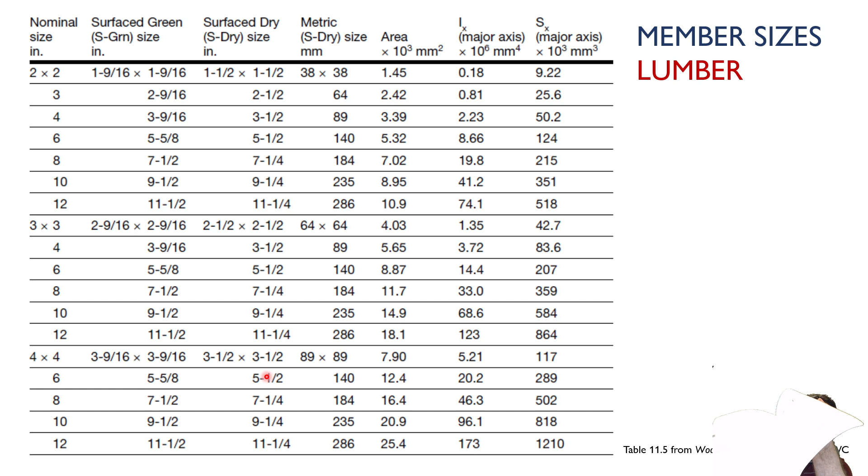So where do I find those sizes? This is a question we get all the time, because it's clear that it's not 2x4, the nominal size, but what is it? If you have the Wood Design Manual, in volume 2, if you go to the reference section near the beginning of that volume, there is a table, 11.5, that gives you the sizes of every piece of wood.

I've put those here for lumber. So here we have a 2x4, and we can see that it's actually 38 by 89. We can also see what the cross-sectional area is - we can easily calculate that, it's just 38 times 89 - but the table also gives the I, the second moment of area, or what we commonly call the moment of inertia, times 10 to the 6 millimeters to the 4, for the strong direction bending. It also gives the S, the section modulus, which we use in our bending equation.

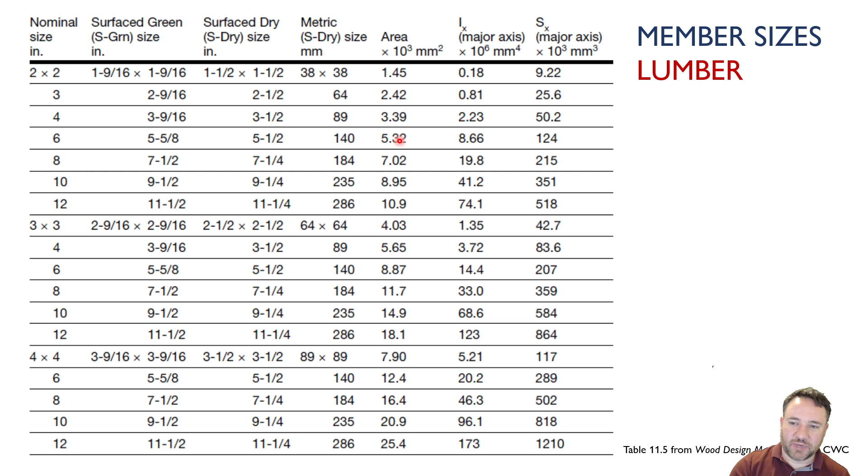If you need to find those values and don't want to calculate them - this is BH cubed over 12, and BH squared over 6, if I recall correctly - you can just grab them from these tables. There's 2x2, 3x3, 4, 5, 6, 3x4, 3x6, 3x8, all the way up to 8x8, 10 by 10, and 12 by 12. So these are all of the pieces of lumber from smallest to largest that are available.

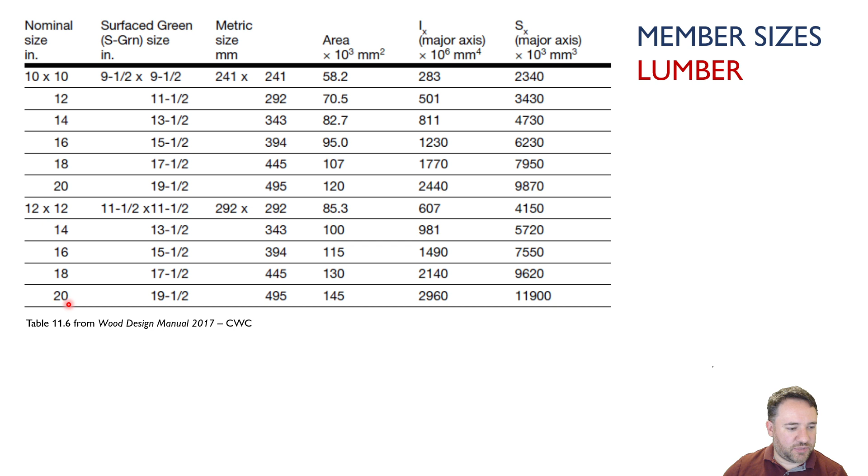Now, actually getting your hands on a 12 by 20 might not be the easiest thing to do, so when you're going into wood design, I wouldn't assume that you'll be able to get that from a lumber yard. Probably you're going to have to build something up if you want it to be that big. But anyway, all the values are there.

Okay, so now moving into grading - how do we figure out what the strength of a certain piece of wood is? When we get it from the lumber yard, it's going to come with a grade, so it's going to say this piece of wood is a certain species group.

So it might be SPF: spruce, pine, fir. And on top of that, it has a grade. So this is a number 1, or it's a number 2, or it's a select structural, which is like the highest grade for this kind of lumber. And depending on the grade, it'll be higher strength or lower strength.

There are multiple ways that they can do that grading. Most common is called visually graded lumber, and that's where number 1, number 2, select structural comes from. So a large majority of lumber is graded this way. Basically, you have a set of rules: you can have so many knots, a certain grain angle, so many checks or splits, whatever. And based on those qualitative requirements, you stamp a grade on it, and we assume a certain strength.

Now, if you take a larger piece and saw it into a smaller piece, then the grading is no longer accurate. Like if I took a 4x4 and cut it into 4 2x2s, those 2x2s would no longer have the same grade. That's not permitted. You have to get it regraded if you wanted to do something like that, technically.

Another way is to do machine stress rated lumber, which basically means they take the pieces of lumber and run them through a machine. The machine bends it a little bit, pushes it a little bit, figures out what the stiffness is, and from that correlates what the mechanical properties are going to be for that piece of wood. So if you have an automated process where you're building engineered wood products and you're stringent about quality control, that's a thing that you might do.

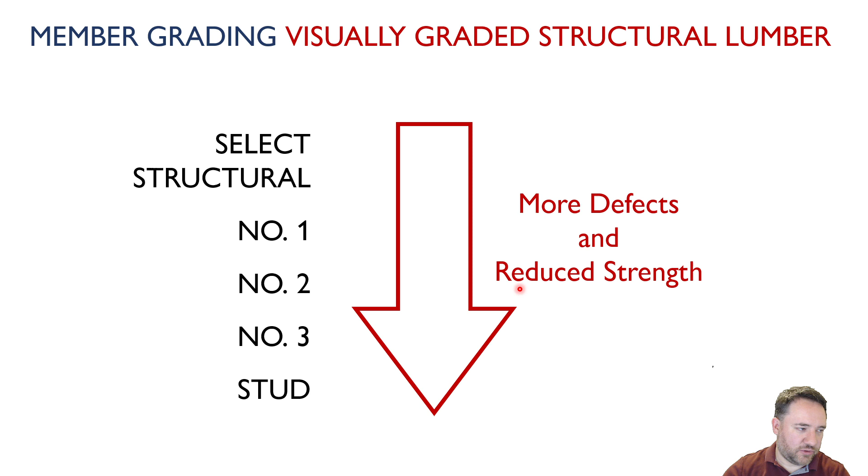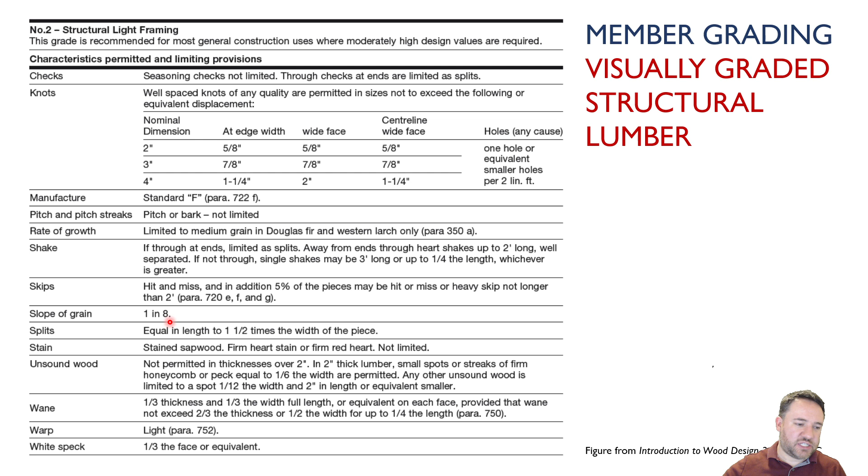Slope of the grain is a big one because it affects, like if I'm pulling on this, what percentage of the load is going purely parallel to grain. But then a small portion, if the grain is sloped, is loading perpendicular to grain, which we know for wood is a very bad way to load it. So that will affect the strength, for example, and a whole bunch of other requirements.

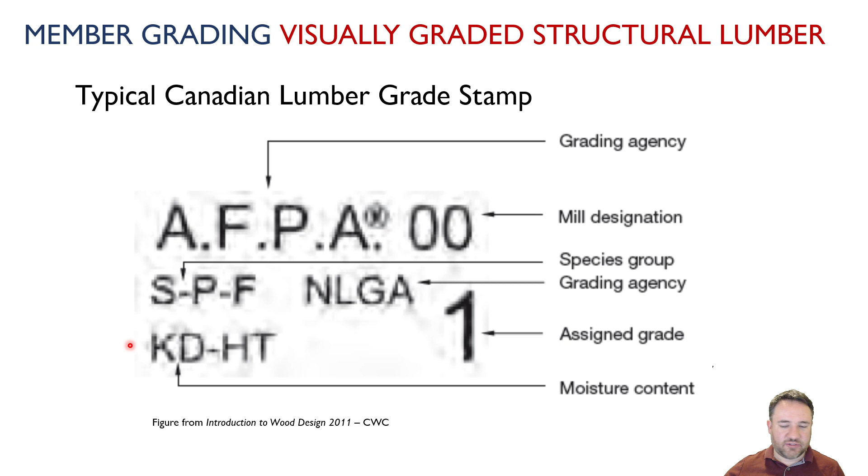And then once they grade it, they take a stamp and they stamp the piece of wood. Each piece of wood will have a stamp that tells who graded it, where the piece was milled, what the species group is, like SPF, Doug fir larch, or whatever, and what grade was assigned. So this is a number 1, SPF number 1. The stamps might look a little different than this, but they should all have that required information.

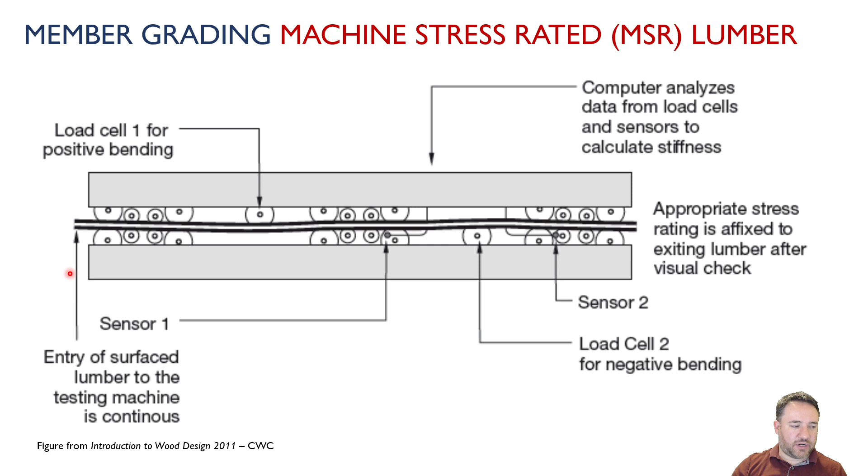This is what that kind of machine might look like. There's one, so you can see you just feed in the piece of wood from one end, and it comes out the other end, and it'll tell you what the grade is, and then you can put the stamp, or it might put the stamp. I'm not sure. So machine stress rated stamp might be a little bit different. It says that it's machine stress rated.

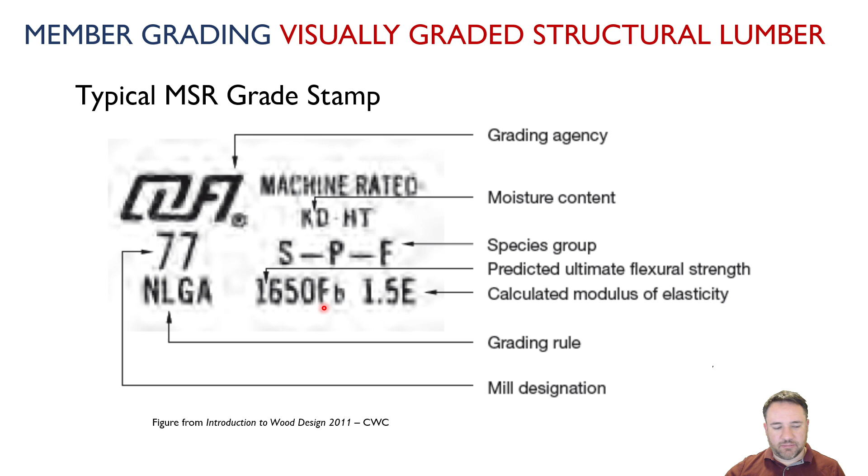Now we no longer have number 1, number 2, etc. It's actually giving a predicted strength and predicted modulus of elasticity coming out of that machine process. So you can have like a whole set of values for that. And we'll see that when we look at the tables. Okay, so those are the 2 types of visual grading.

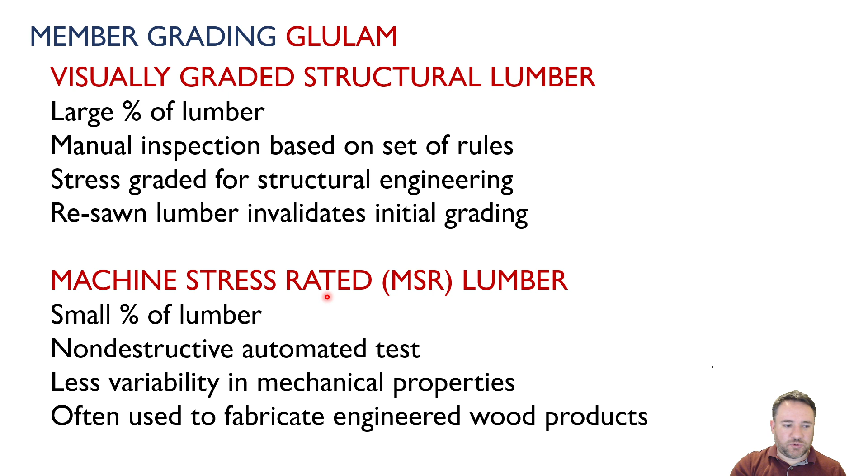Now for grading of glulam, it's a little bit different because it depends on what is the composition of the glulam, right? So here are a couple examples for beam grade glulam. And you can see that depending on whether the member is loaded as a simply supported beam, like just sitting here and loaded in the middle like this, or whether it's loaded as a continuous beam or as a cantilever, so it has bending in both directions, we might lay up different pieces when we fabricate the glulam.

So the glulam is layers all glued together. So I can change the quality of those layers depending on what my purpose is. So E grade in general, and we'll see this in the tables, E grade is meant to be bending in only one direction, and so they're going to put a strong ply just on the tension side because that's going to be the critical side for bending resistance if I'm only bending in the downwards direction. So if I'm only bending like this, for example, I'll put the stronger piece on the bottom.

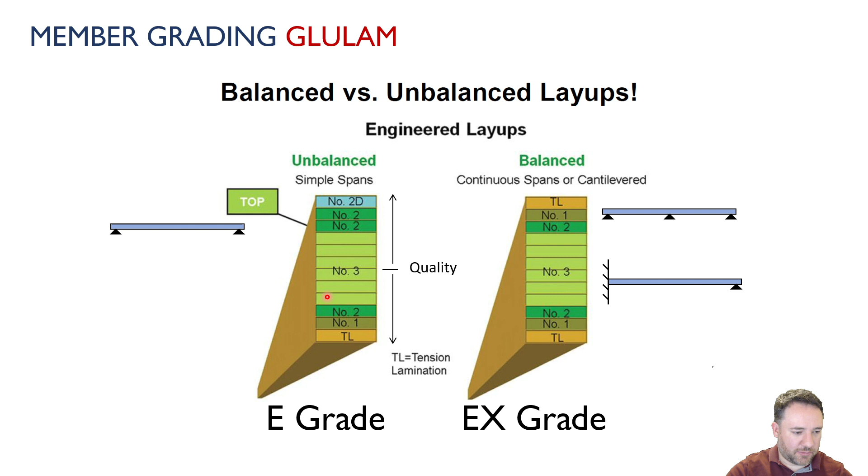EX grade means that it's in both directions. And so there'll be kind of a standard for this. Now there are numbers in the code for this, but if you are designing with glulam, you should check the manufacturers in your area because they likely have a whole set of different properties for their own glulam because they might lay it up differently. Like they might have their own proprietary way of distributing the strength. Then based on test data, they would come up with their own strengths. But in this course, we're going to only use the values that are in the book.

So you can see all of the different grades. So they have ones that are intended to be used for beams. There are some that are specifically intended to be used for columns, and there are others that are specifically intended to be used for tension members. You can mix and match. I mean, the columns can take bending and the beams can take axial, but they have a primary intent based on how the layups are.

And there are different species as well, and a lot of this will have to do with where in the country you are when you order the glulam. So you might have spruce pine species in the glulam, you might have Douglas fir larch, and you can see that this 20 is actually kind of a measure of the strength. It's kind of an indication of the strength right in the grade marking. So you can see the Doug fir larch ones, you can get higher strengths, and we'll see those in the tables.

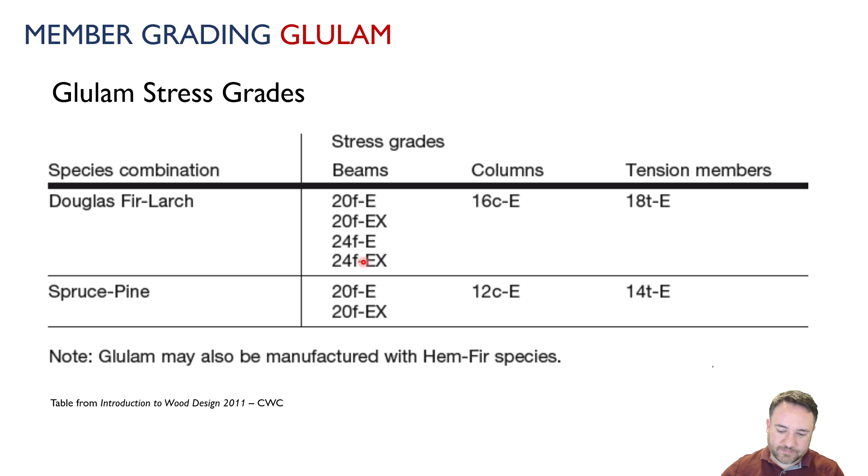Okay, so now that I know all about how these things are graded, how do I actually go about finding the strength that I need for my specific equation from the standard that I'm trying to apply? So for glulam, it's quite easy. I just go to the table, and as long as I know my species and grade, I can pick out whatever quality I want.

But for lumber, it's a little bit tricky because there are multiple tables for strengths depending on what kind of lumber piece that you're talking about. So the first step is actually to determine the grade category. So this table 6.2.2.1 in the standard is the first place that you would go. And basically what you need to do here is based on the size of the piece and based on the grade of the piece, then you determine which grade category you're in.

Okay, so for example, if I have a 2x4, but if this is a 2x4 number 1, then over here, you see my smaller dimension is 2. My higher is the 4, which is 89, 3.5, right? So 38 by 89. So it could be any of these three. Then I said, okay, well, I'm talking about number 1. So I'm talking about this one here. So I am in the structural light framing grade category. Okay, so I need to go to table 6.3.1a. And at the top of that table, it says structural light framing. And so that's where I'm going to get my property values for.

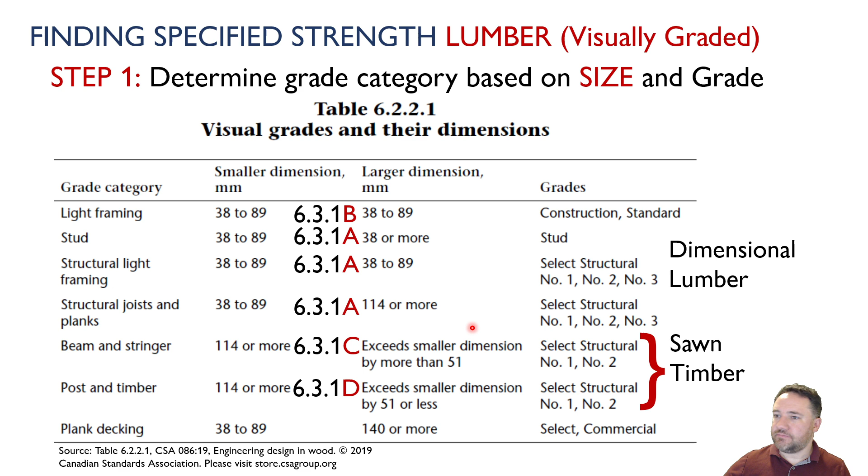Okay, so then once I know which grade category I'm in, I can go to the appropriate table. This is just an example of one. So this is 6.3.1. So this was structural light framing. So that's where this 2x4 is. Structural light framing, if it's like a 2x4 SPF number 1, then I can find my species. So let's say I'm SPF number 1. And then I can read across here all the different values for strength and for stiffness. So bending, longitudinal shear, compression parallel, compression perp, tension parallel, and my two moduli for my average modulus of elasticity and my 5th percentile modulus of elasticity.

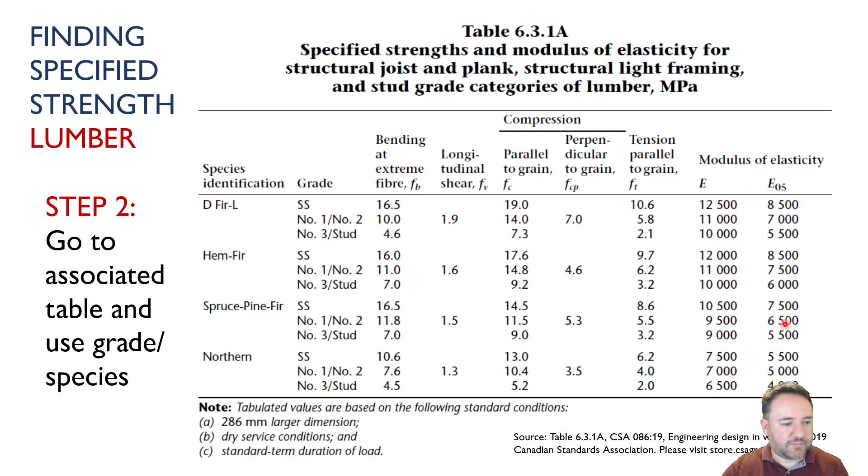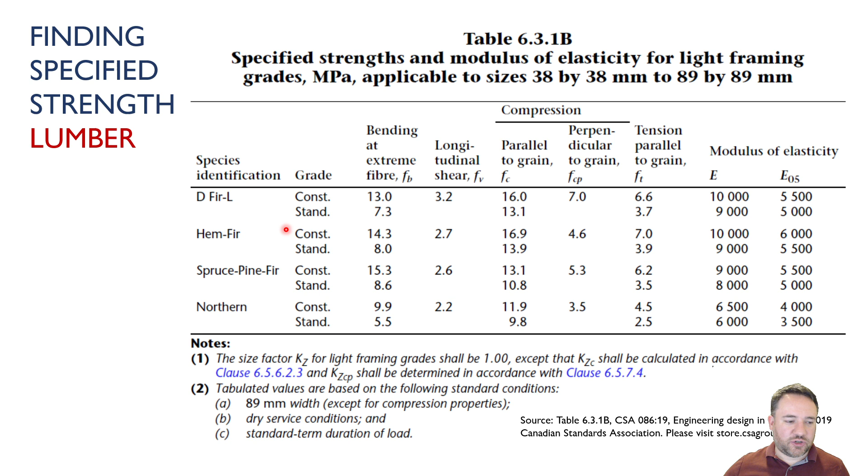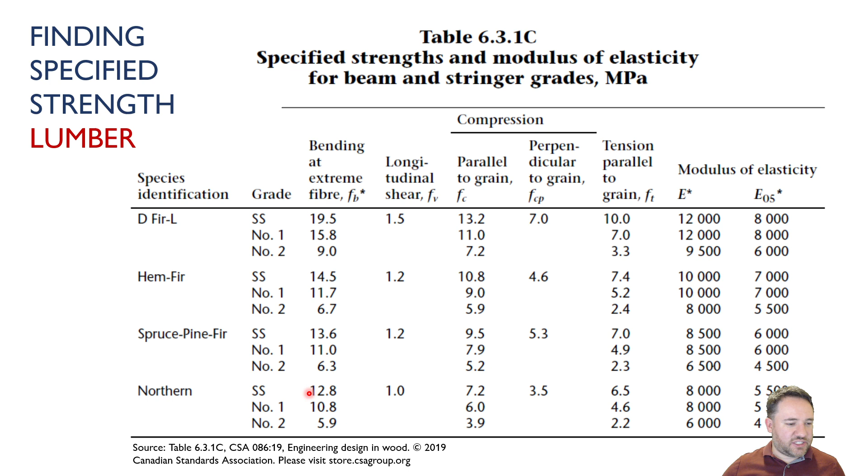Okay, here is table 6.3.1b, which is the one for light framing. So this one has different grades. Okay, so it's also 2 bys, but let's say wherever you are, it's like a different grade. It's not number 1 or number 2. It's graded differently. Then you go to this table. You know, if it's a sawn timber or beam and stringer, so this is a sawn timber type of grade. And you can see all of these values are all different for all of these. So there's a lot of work gone into figuring out what are the appropriate values for each of these. So each of these numbers represents a whole bunch of tests.

Okay, and you see these tables have a lot of notes on the bottom, some of them, when you go to the standard to take a look at them. Here's one for example. So when I'm talking about beams and stringers, it says below that this table is intended for when the loads are applied to the narrow face. So let's say this is a beam and stringer, so it's a sawn timber, quite a bit bigger than this. But let's say I have it oriented like this. The table there is assuming that you're loading it on the short side, right?

Now it says if you are loading it on the long face instead and bending it in this direction, then you have to modify your bending strength, and you have to modify your modulus of elasticity as well. So pay attention to those notes. There aren't a lot of them that change a lot.

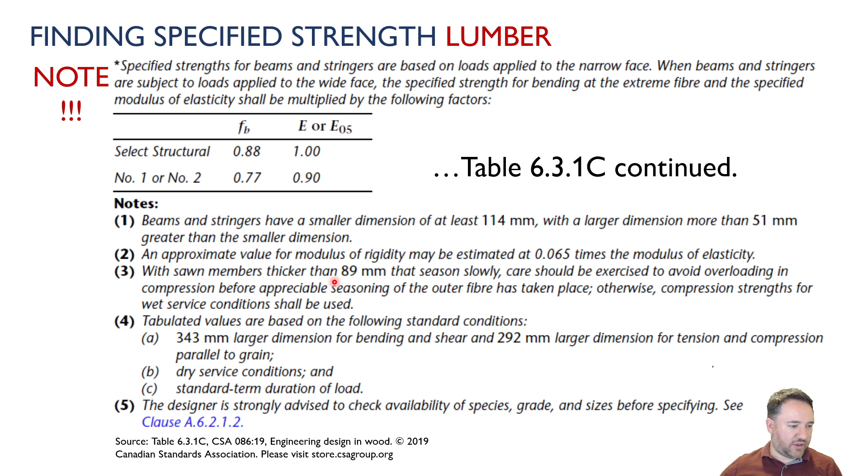Most of them are kind of warnings, you know, be careful to season the wood properly so that it's for sure dry and all this stuff. But that's one for sure that, you know, you never know could come up.

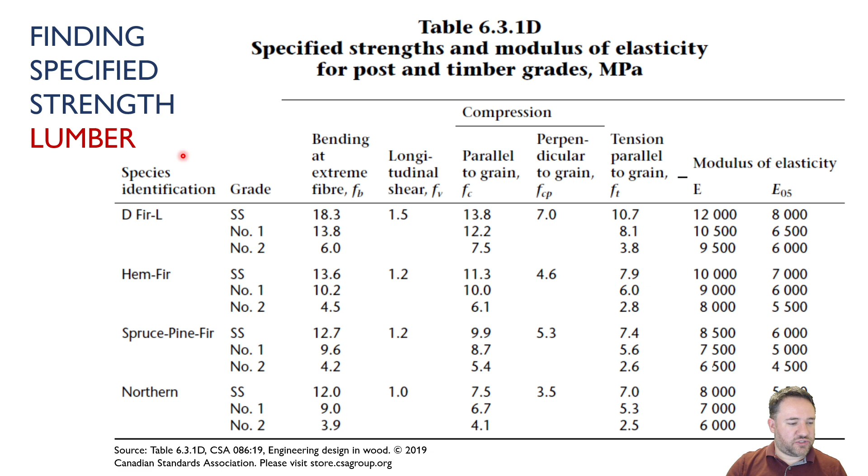Okay, and then this is the last one, which is for post and timber. These are for the ones that are more square. So basically the cross section is square or close to square. They're probably going to be columns, posts, right? And so these are all the values for those, and you know, a ton of notes.

Okay, and here, you know, it says, just like I was saying, designers strongly advise to check availability of species, grade, and sizes before specifying. So you're going to go through a lot of trouble and make a timber design, and then find out when the contractor goes to build it that there's no way they can get that size of a piece of wood, and then you're going to have to go through a rigmarole,

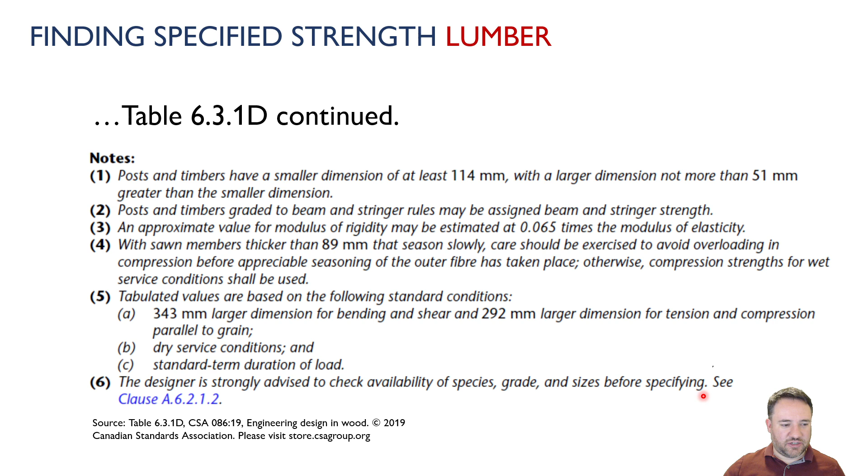and there's going to be construction changes, and it's going to cost the owner money, and they're going to be upset, and then you're going to be upset. So just be aware of what's available in your area as you do the engineering. So we're not engineering in a bubble, obviously.

Okay, so then that was for all visually graded lumber. For MSR lumber, there's a table for the machine stress rated stuff. You can see the grades. We saw these in the grade marking. This is a strength and a stiffness combination, and then they have values as well.

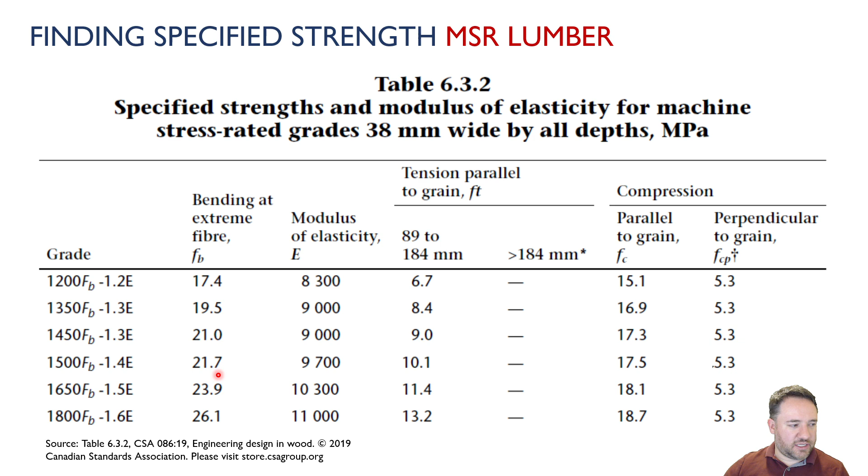I'm not going to specify these kind of members in this course, but you know, if you ran into something like this, then this is where you would get the values. There's table 6.3.2 for that in the standard, in the O86 standard.

Now, when I'm doing Glulam, it's a bit easier because I no longer have to go to a grade category. All I need to know is the species and the grade. So if I know I'm going to use Douglas fir larch 20f-E grade, then I can find my bending moment, my shear, my compression parallel resistance, compression perpendicular resistance, all of the required resistances, including modulus of elasticity, are all in this table.

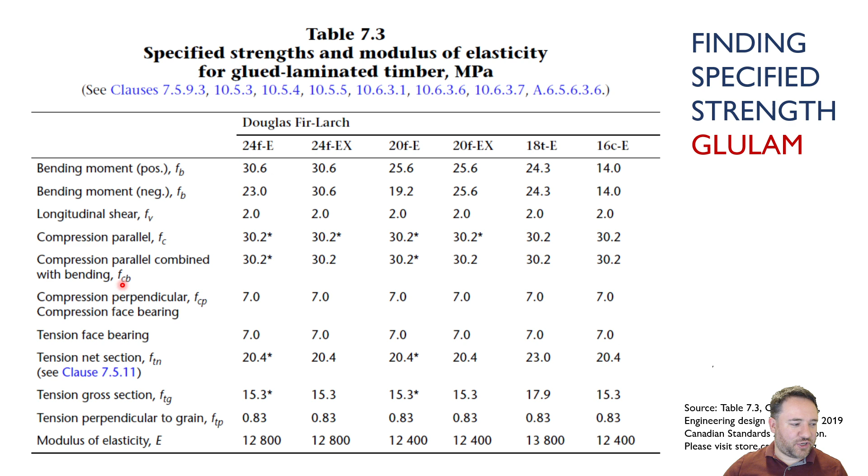These tables, it's a bit funny that these ones are flipped relative to the other ones. So the other ones had the strengths on the top and the grades on the side. This one has the grades on the top and the strengths on the side. So anyway, I'm sure you're going to figure it out. So that's for Douglas fir larch species.

This table continues down a bit further for two other species combinations, spruce, lodgepole pine, jack pine, which in this course I'll just call spruce pine, and hem fir and Douglas fir larch combination here. You can see the effect of the different layup in this table. For 20f-E, remember that E is the one that's not symmetric, so it has a stronger piece of wood on the bottom of the glulam.

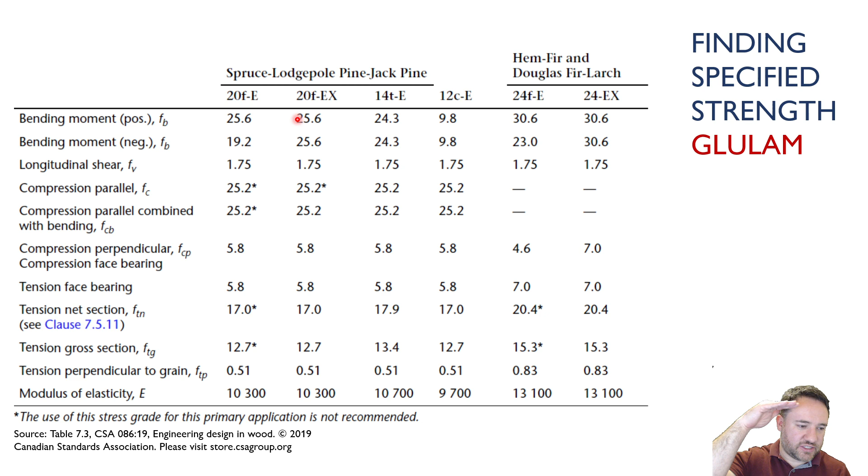You can see that the bending moment in the positive direction is larger than the bending moment in the negative direction. So you can apply negative moments to those, but they won't be quite as efficient as if I use the 20f-EX grade, which has the same strength in both directions because it's got strong plies on the top and on the bottom.

Okay, so I'm just going to finish this off by showing a few examples of how to go through that process. I'll point a few things out, won't take very long. So I'm going to find the strengths for these three different pieces of wood. One is a 2x4 SPF Select, that's Select Structural. And I want to find the compression resistance parallel to grain. So how do I do it?

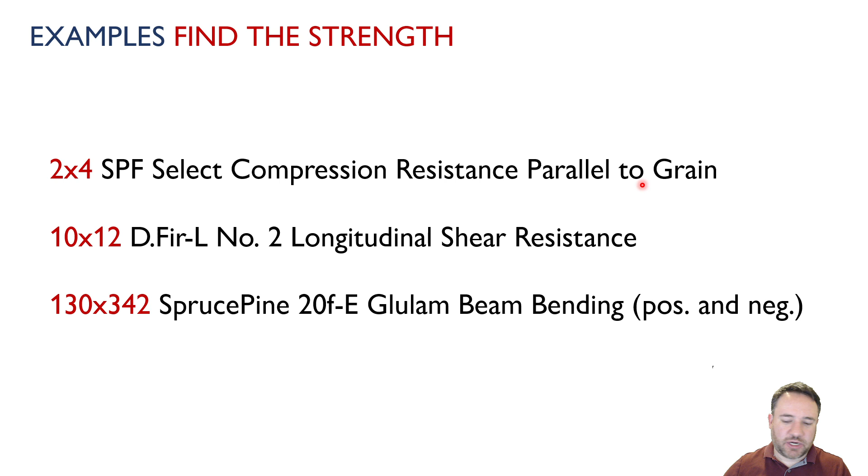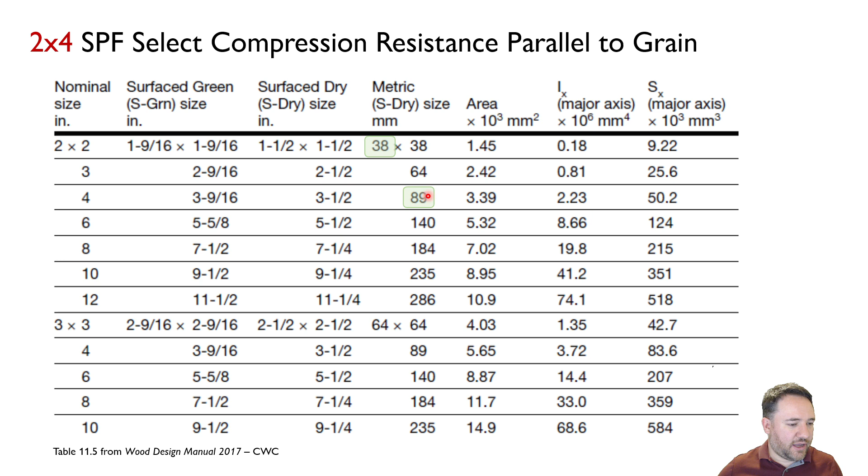I'm going to start by figuring out what the size of my member is if I don't already know. So a 2x4, going to this table 11.5 in the wood design manual, and I see that it's actually 1.5 inches by 3.5 inches, which is actually 38 by 89. So now I know the size of my piece of wood so that I can go to my grade category table and figure out which grade category I'm in.

So smaller dimension was 38. That's the 2, it's a 1.5. The larger dimension was 89. So actually there are 3 different options here for grade categories that will work, right? So it could be light framing, could be stud, could be structural light framing.

But I also had the piece of information that I'm talking about select grade. So that's select structural grade. So that's not available in light framing or stud grade categories. It's only available in structural light framing grade category. So I know that I'm talking about structural light framing grade category for this particular piece of wood, 2x4 SPF Select.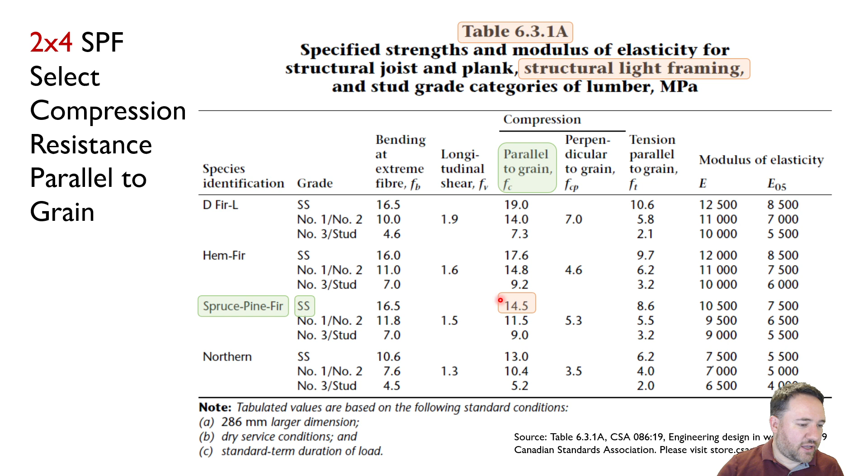Second example, larger piece of wood, 10x12 Douglas fir larch number 2, looking for a longitudinal shear resistance. So I'm going back to table 11.5 to figure out what the actual size of that piece of wood is. So I've got a 10x12, which is actually 9.5 by 11.5. So I have a 241 by 292.

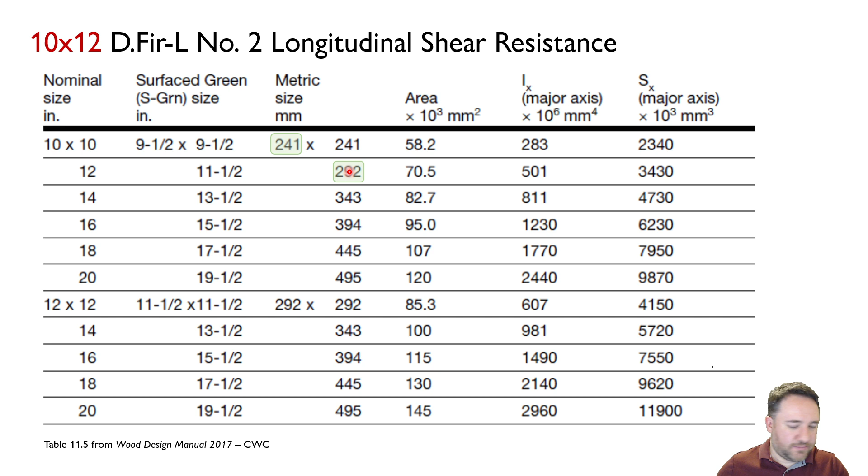So going to my grade category table, I know I'm 241 by 292, so small dimension 241 is only these 2 possibilities. 292 is the larger one, exceeds the smaller dimension by 51 or less. Okay, so how much does it exceed? 292 minus 241 is 51. Okay, this says 51 or less. Okay, so this is right on the border.

Okay, you'll notice this one says exceed smaller dimension by more than 51. So that means 52 or greater. I don't know why they didn't put this a little bit higher to make it a little bit more obvious that this one would fall into this category. But anyway, so it's 241 by 292, 51 or less. So it falls then into post and timber category. Okay, one because it fits here, it's a number 2, so that's good.

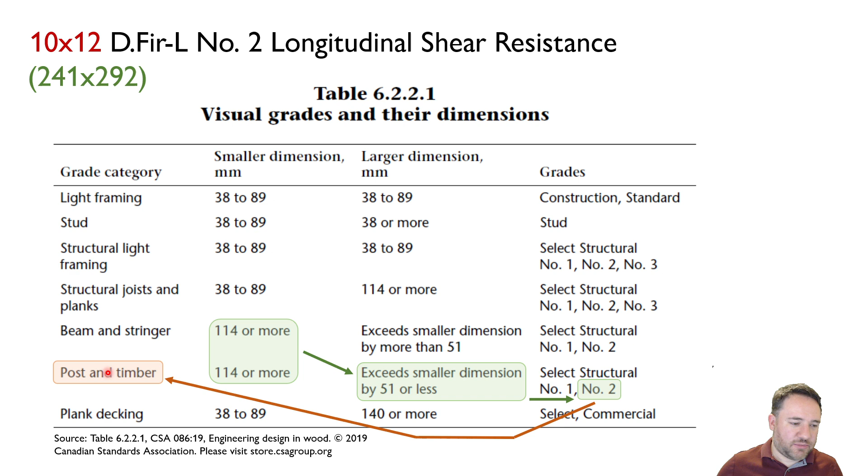Post and timber. So now I have to go to the table for strength, 6.3.1D, which is the post and timber grade category table. And I know I have a Douglas fir larch, number 2, and I'm looking for longitudinal shear. And the reason I picked longitudinal shear here is because some people get confused by the fact that there's only one number in here, and these are blank.

This 1.5 applies to all grades. So it just means that the longitudinal shear is the same for every grade of Douglas fir larch. So even though I'm down here, the 1.5 applies. Okay, so my longitudinal shear for my Douglas fir number 2 is 1.5 MPa.

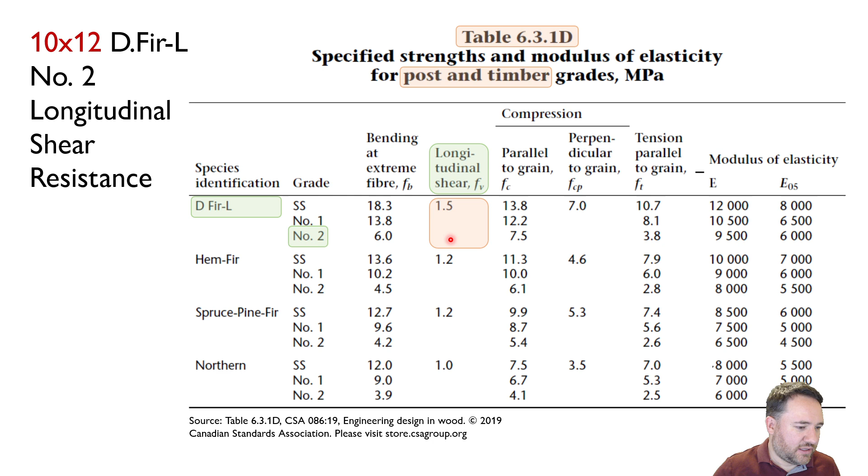Last one is a Glulam example. So I have a spruce pine 20f-E Glulam beam. I'm looking for positive and negative bending strengths. Okay, so the first thing I need to do is go to that table 7.3 and find out which species I'm talking about. So this is spruce pine. So it's not the top part of the table, it's the bottom part of the table.

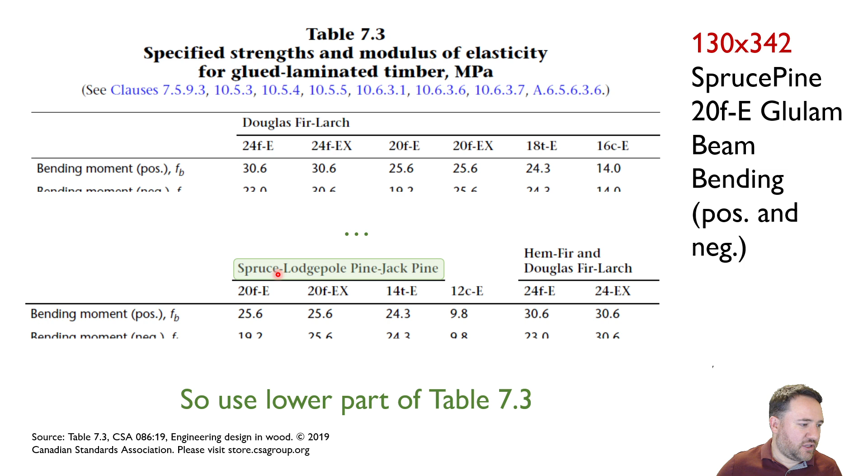Spruce, lodgepole pine, jack pine. So I'm going to use the lower part of this table now. Okay, this is just that lower part blown up. Spruce, lodgepole pine, jack pine, 20f-E grade. And I'm looking for bending moment positive, bending moment negative. And here you see I have a positive of 25.6 MPa and a negative of 19.2 MPa.

And this is one of those cases where it's different. And that's because this is not a symmetric layup pattern. So the bottom ply is only the strong ply and the top one is not stronger than normal.

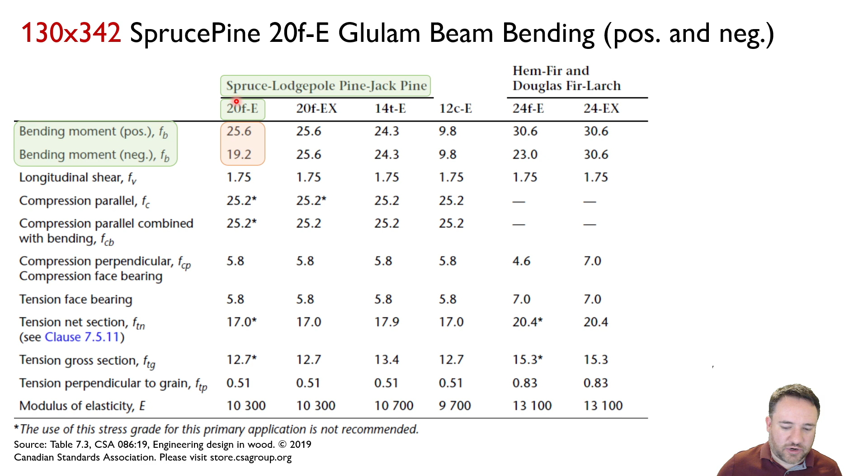So now we know how to specify wood properties. We know what the grades mean. And so hopefully now when we dive into doing design for tension, design for compression, when we need to find those strengths, we know which tables to go to.